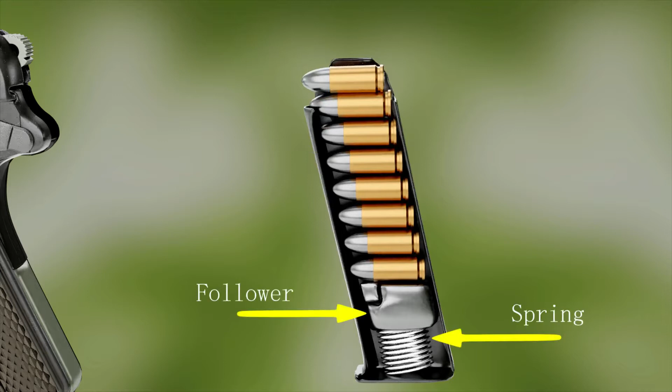This is a cartridge. It is loaded into the magazine, in which the follower and spring keep the cartridges under pressure. The design of the magazine is such that the cartridge can come out only by sliding forward. The magazine is kept into the gun.

Important internal parts of the pistol are shown here. To fire the gun for the first time, the slider needs to be pushed back with the hand against the force of the recoil spring.

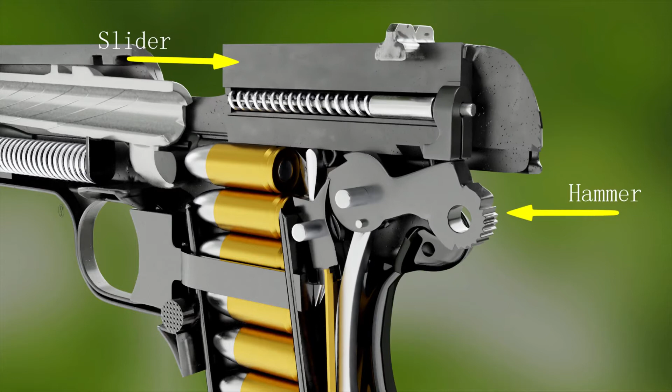This causes many things simultaneously. Let's see them one by one. First, the movement of the slider pushes the hammer back. The hammer is connected to the main spring through the hammer strut, and thus compresses the main spring.

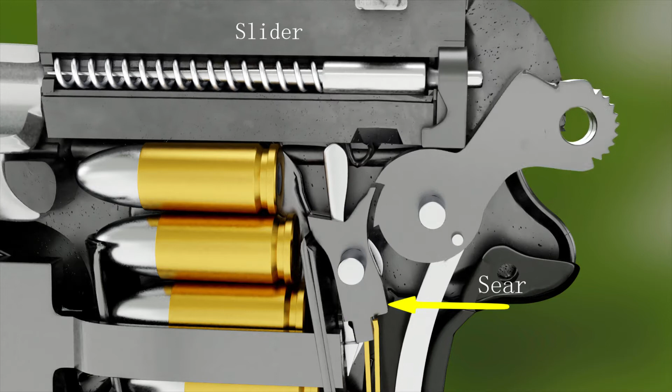This is the sear. It controls the movement of the hammer. When the slider moves back, the sear, under the pressure of the leaf spring, engages with the hammer and prevents it from returning back to its initial position.

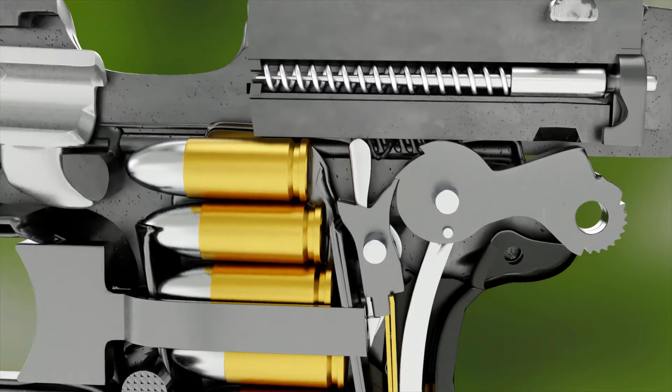When the slider is released, the recoil spring causes the slider to return to its initial position, while the hammer remains at its position due to the sear. This is called cocking of the pistol.

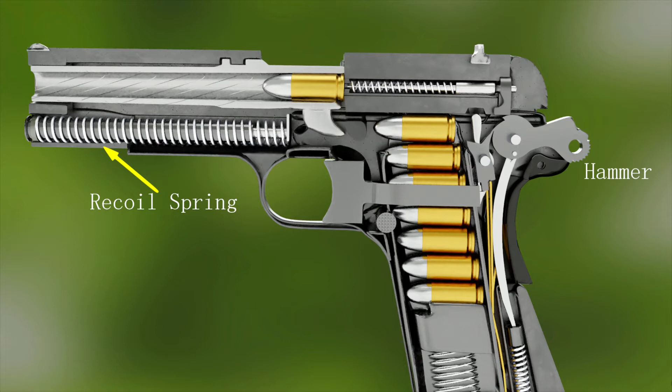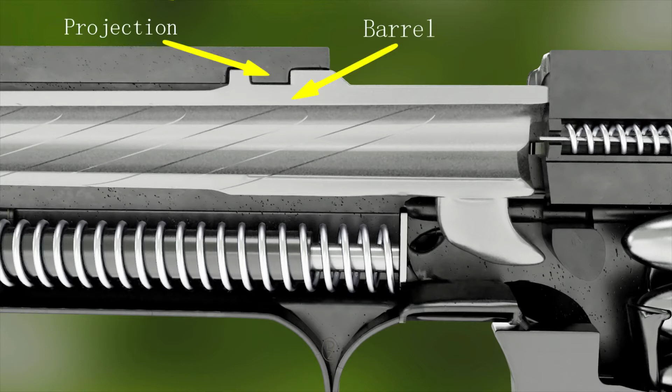Now, let's see how the cartridge is loaded into the barrel. When the slider moves back, it pushes the barrel back through the projection on the slider. This lowers the barrel so that the cartridge can be fed into it easily.

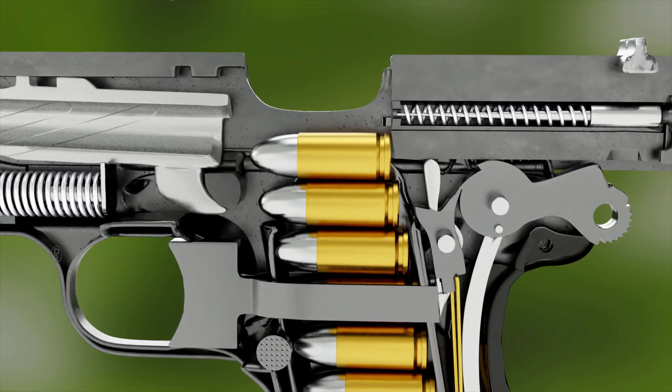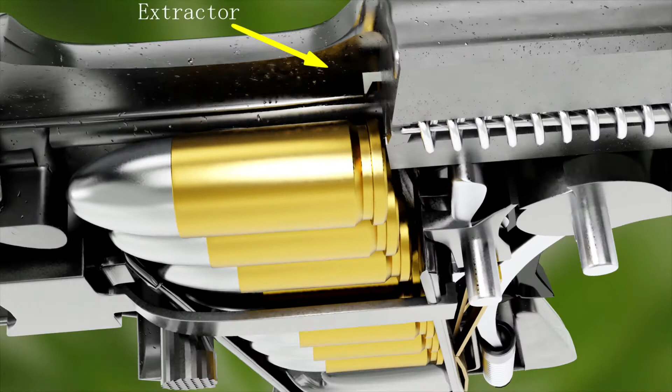When the slider is returning back, it takes one cartridge into the barrel and pushes the barrel forward to its initial position. The back of the cartridge fits into the extractor's notch, which is attached to the slider. The pistol is now ready to fire.

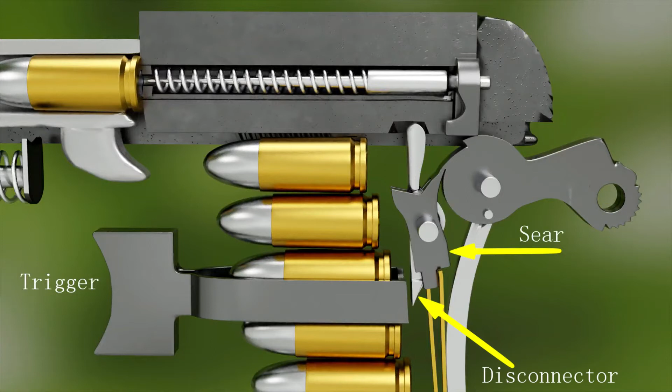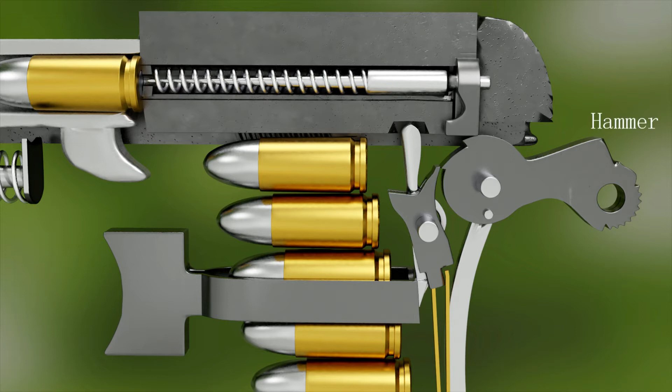When the trigger is pulled, the sear is pushed through the disconnector. This causes the sear to disengage from the hammer. The hammer is now free, and under the pressure of the main spring strikes the firing pin, which is contained inside the slide.

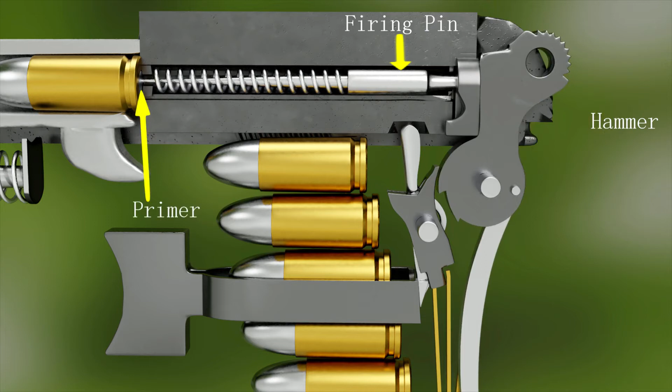This firing pin in turn hits the primer of the cartridge at its back. The primer contains impact-sensitive explosive, which gets ignited by the impact of the firing pin.

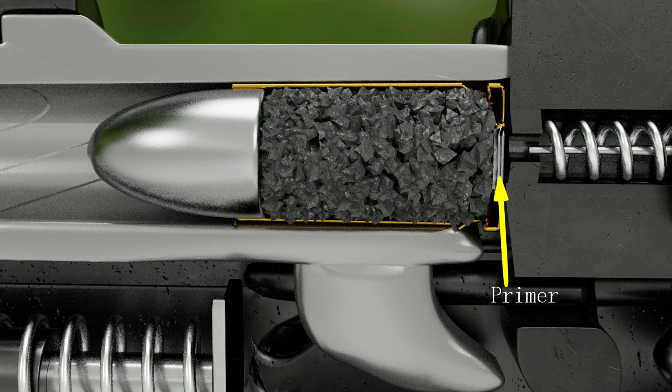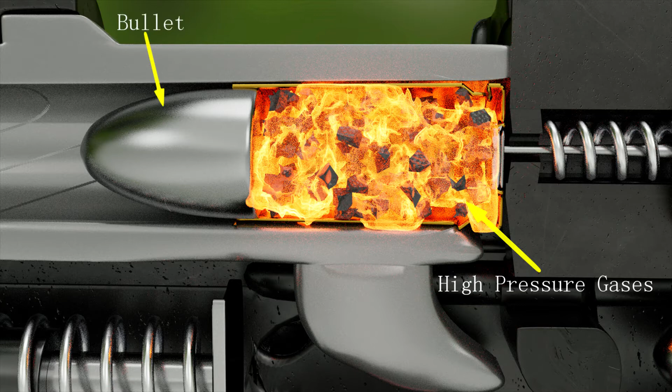This burns the powder inside the cartridge, producing lots of gases, and thus the volume behind the bullet is filled with extremely high-pressure gases. Thus, the bullet is forced into the barrel, causing the bullet to come out at a very high speed.

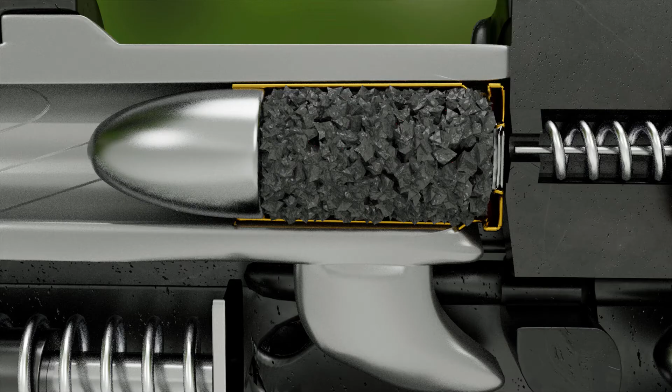Once the bullet comes out of the barrel, gases are released into the atmosphere, and no more force is exerted on the bullet, and the bullet continues to move due to its momentum.

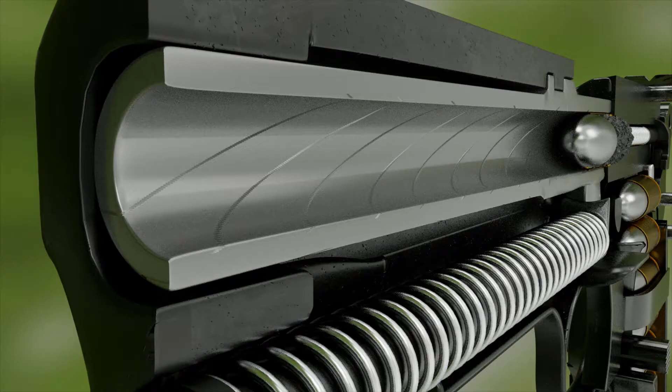The lands and grooves are cut into the barrel, which causes the bullet to spin for stability.

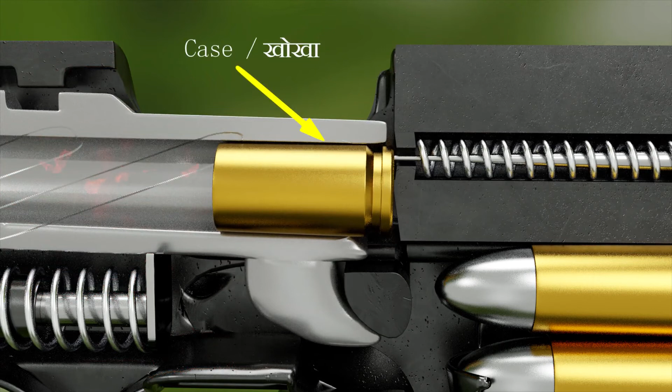These gases also apply equal and opposite forces on the gun, but due to the heavy weight of the gun, it does not attain a higher speed in the opposite direction. Some of the energy of this explosion is utilized in pushing the slider back. The case moves with the slider and is ejected out with the help of the ejector.

The slider also cocks the hammer by pushing the hammer back and reloads the gun automatically. And the gun is again ready to fire the next round.

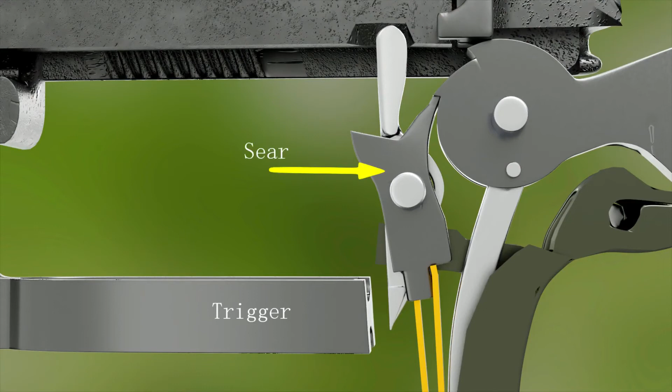The trigger does not push the sear directly. The sear is pushed with the help of the disconnector. When the slider moves back, with the help of a slot cut into the slider, it forces the disconnector to slide down.

This disconnects the trigger and allows the sear to engage with the hammer even when the trigger is pressed.

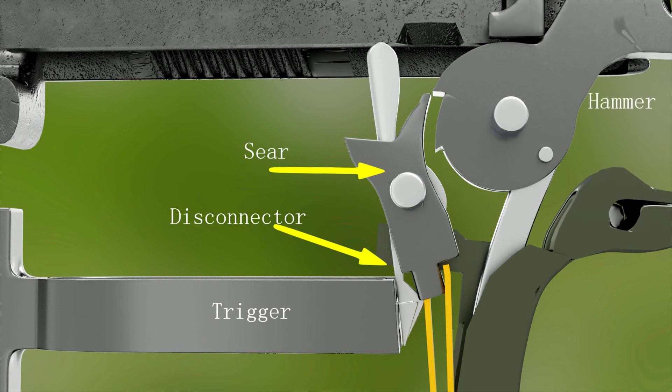When the trigger is released, the disconnector moves into the gap in the slider under the pressure of the leaf spring, and thus the gun can be fired again.

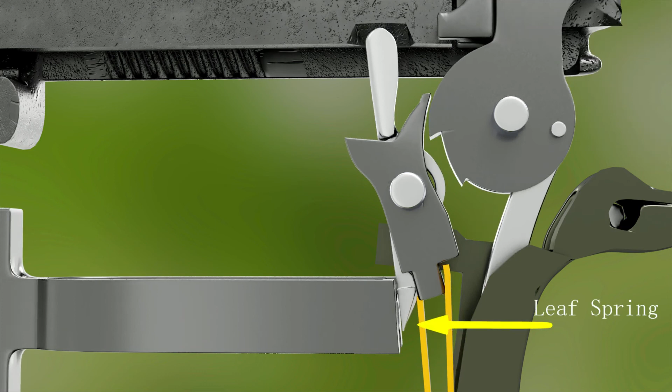The grip safety prevents the gun from firing. Only when the gun grip is grasped by the hand can the trigger move the disconnector and thus the sear.